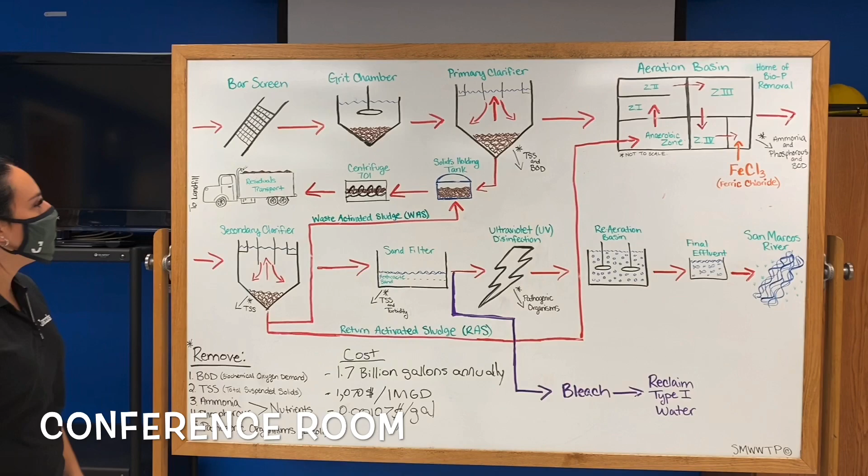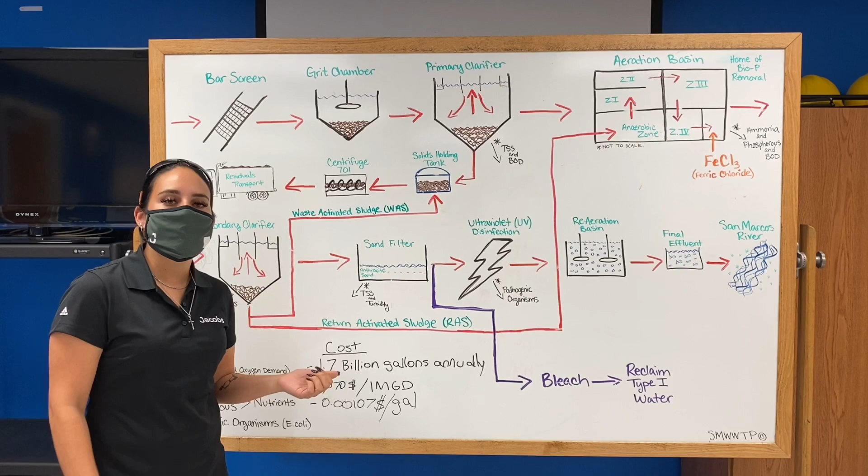Conference room. I'm going to give y'all a quick overview of our treatment process via this drawn out diagram. So basically our influent water comes in first through the headworks and then we'll run through the bar screen and the grit chamber. The purpose of this physical process is to take out all the rags and toilet paper and grit and sand that may come through the water, and then that will be dumped in a dumpster and hauled away to the landfill, and the rest of the water will continue on to the system to continue the treatment process.

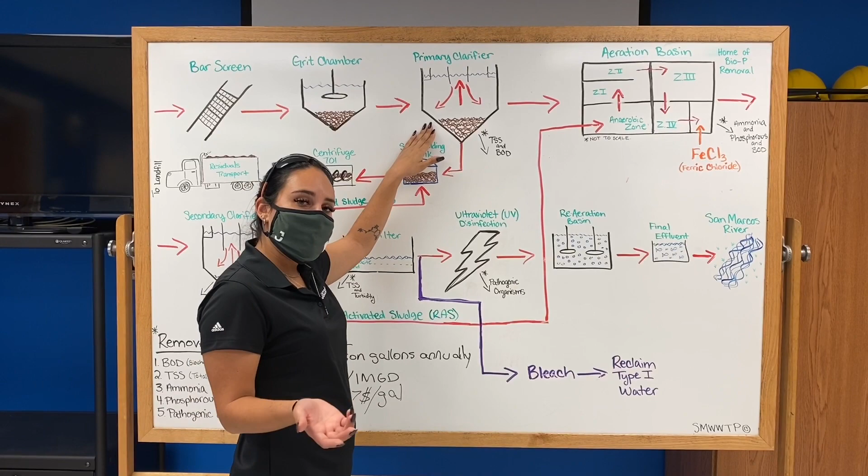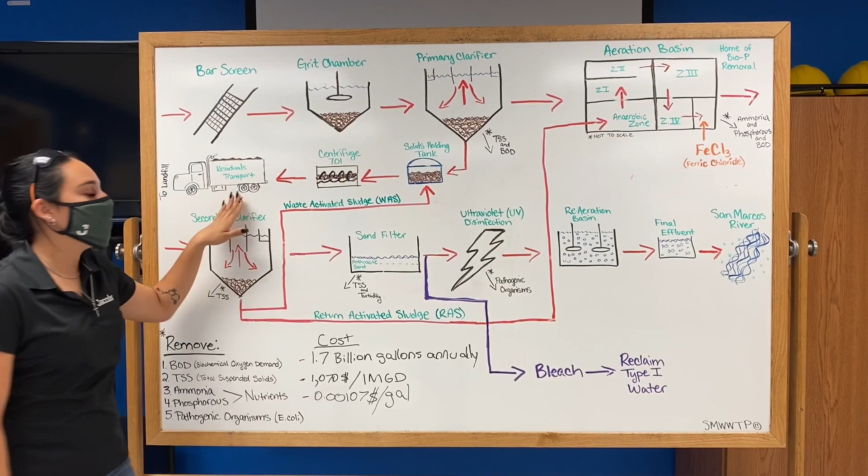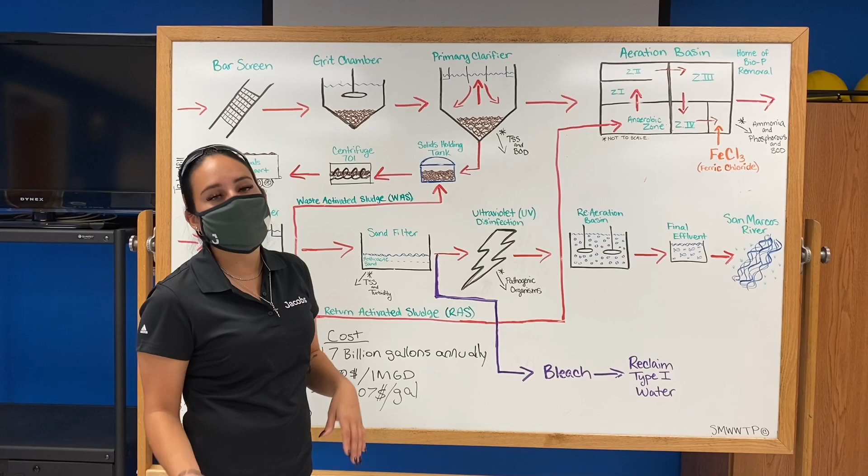After it goes to the bar screen and grit chamber, the water will continue to the primary clarifier, which is another very physical process. The solids will drain to the bottom and get pumped out to the solids holding tank and will get processed in the centrifuge and get hauled away to the landfill. And we'll go into biosolids management in a different episode because some facilities will use their biosolids and convert it to fertilizer. Unfortunately, at this facility, right now we just haul it to a landfill.

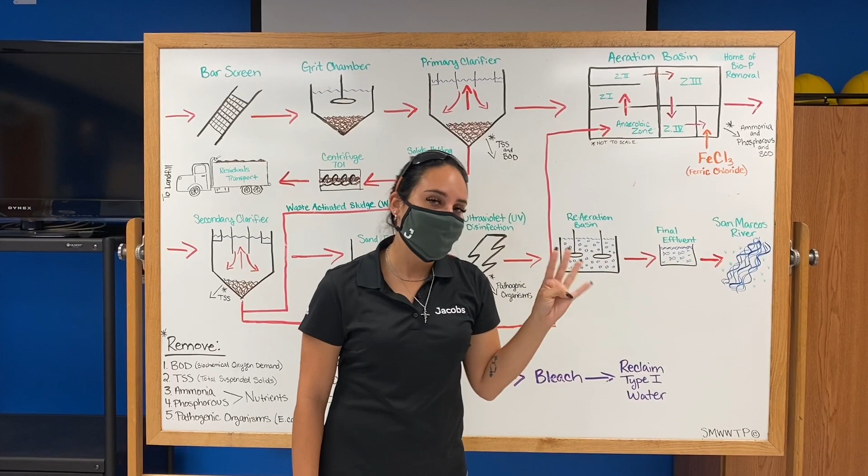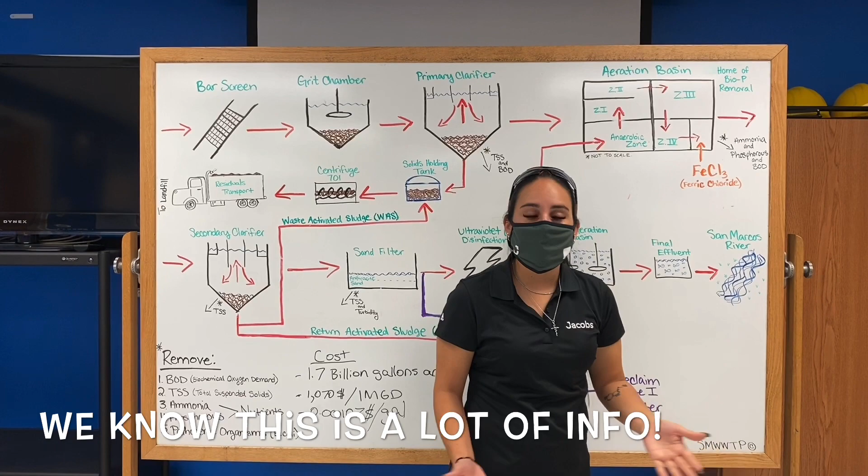So from the primary clarifier, water will go into the aeration basin. We have an anaerobic zone and then 4 zones, and we have an identical side with another anaerobic zone and 4 zones. So the purpose of the aeration basin is our little microbiology environment that we build and maintain to treat the water biologically and to meet our permit requirements.

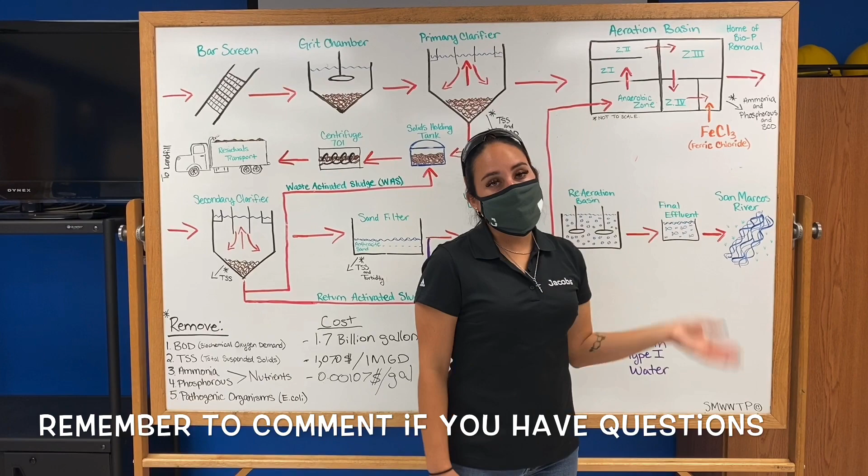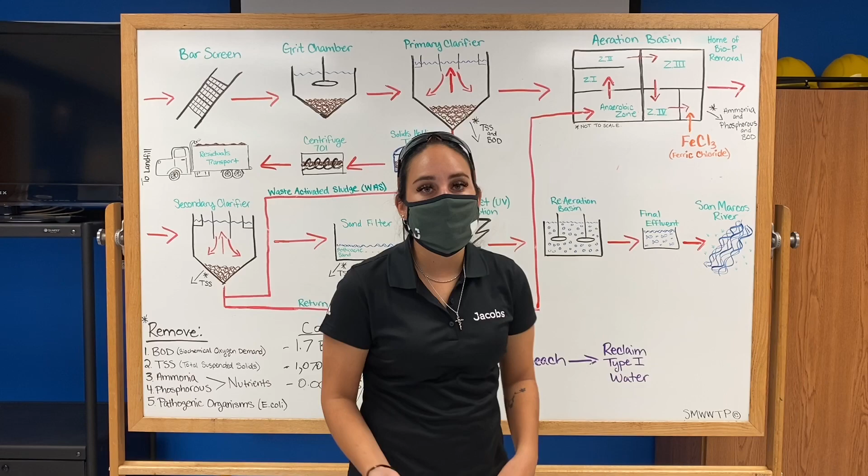So for example, our phosphorus limit is 1 milligram per liter. And if we get close to that limit, then we add ferric chloride, our chemical, but we try not to add the chemical unless absolutely necessary. What we try to achieve is biological nutrient removal or biological phosphorus removal via the organisms that are already present in the wastewater. And this is the area in which we try to do that.

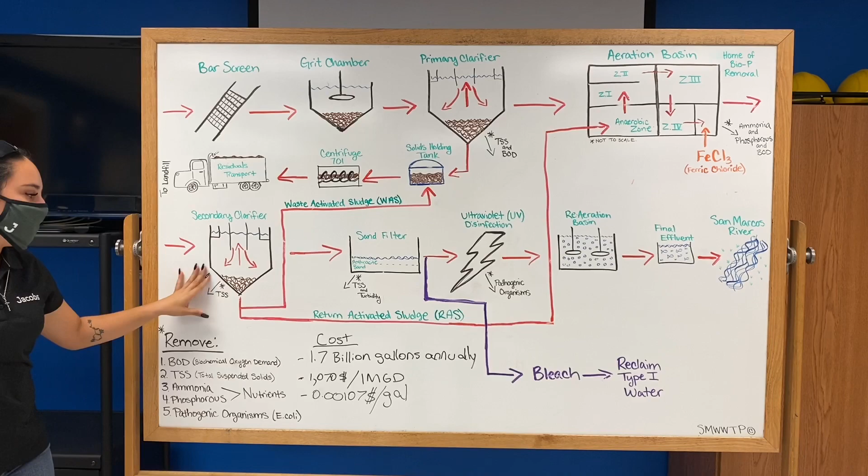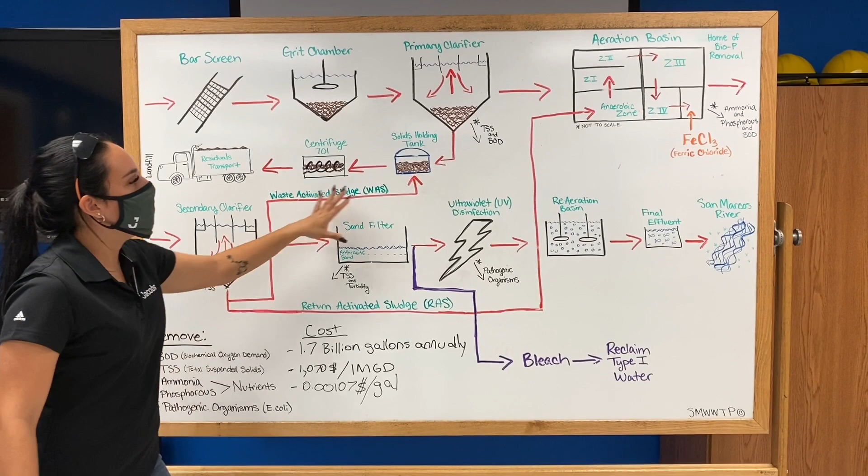So after the water gets treated and the phosphorus and other nutrients are removed in the aeration basin, the microorganisms will move on to the secondary clarifier, and those microorganisms and leftover solids will get wasted out in this area here, very similar to the primary clarifier, and it will get pumped back to the solids holding tank. But the only difference in the secondary clarifier, the other half of the solids will actually get returned back to the aeration basin to keep our bug or microorganism population alive, so we can continue doing our biological nutrient removal or biological phosphorus removal process.

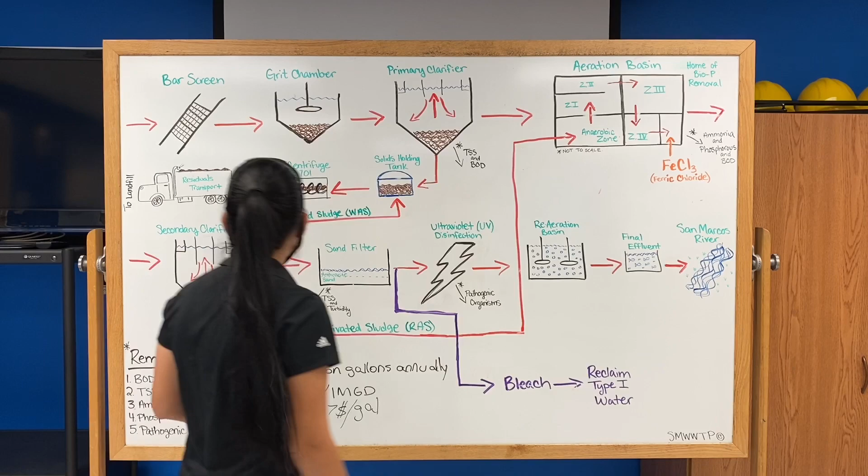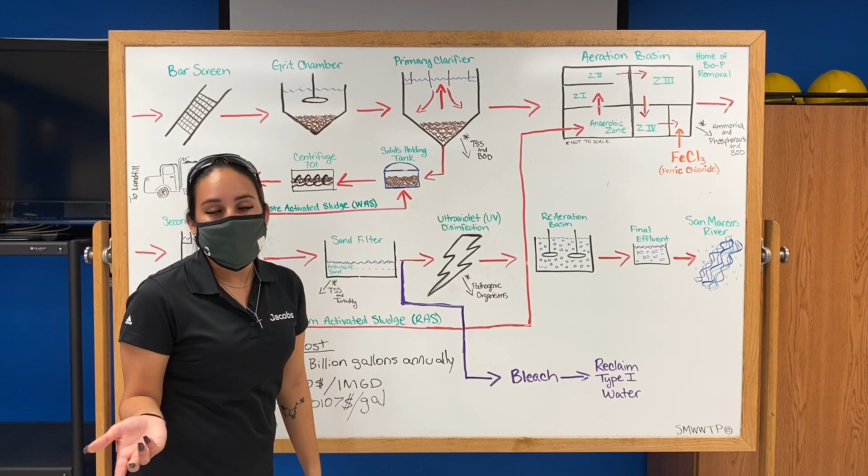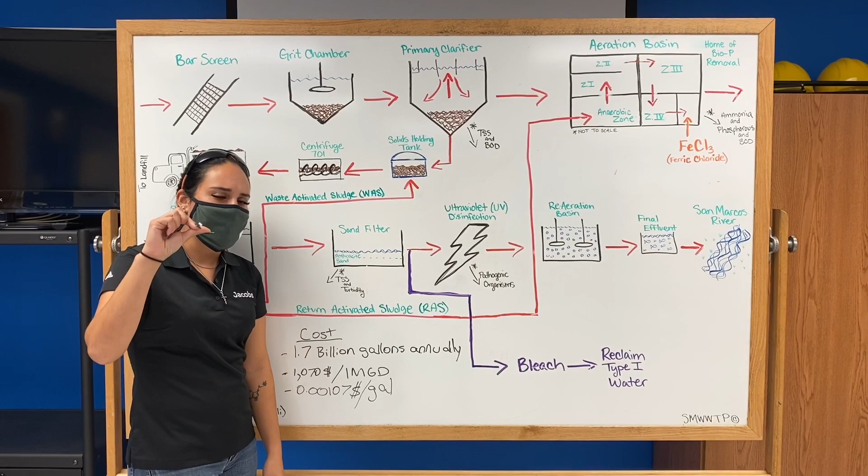So from the secondary clarifier, after the solids have been removed, the water will continue to our sand filters or tertiary filters. So if any of you have any fish at home in a fish tank, you probably use carbon filters. It's a very similar process. We use anthracite and sand to filter the water to get those fine microscopic particles out, so then we can disinfect it via UV light.

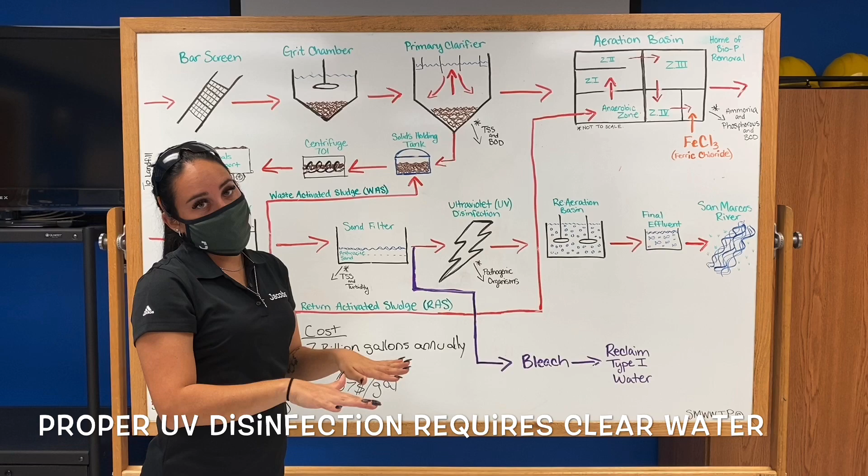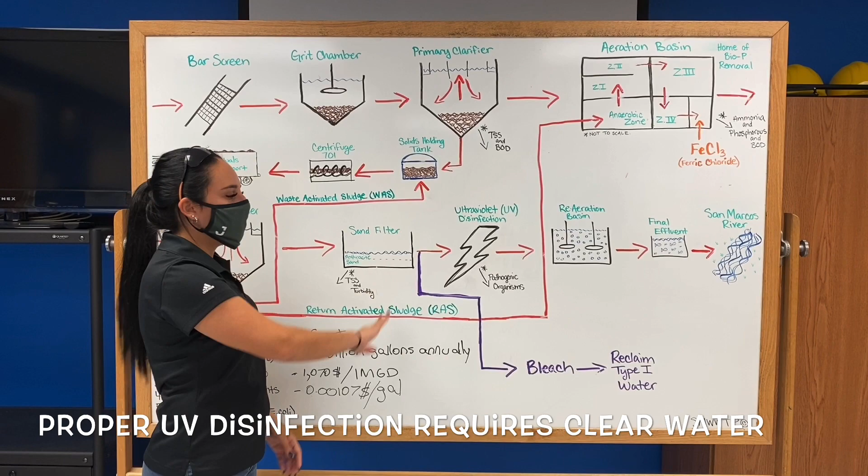So the sand filter is a gravity system. The water will drain through the anthracite and sand downward, get backwashed, the dirty water out, and the backwashed water will return to the front of the plant and the treatment process will start again. The rest of the filtered water will continue on to the UV disinfection system. It will get blasted with UV light, just like a tanning bed.

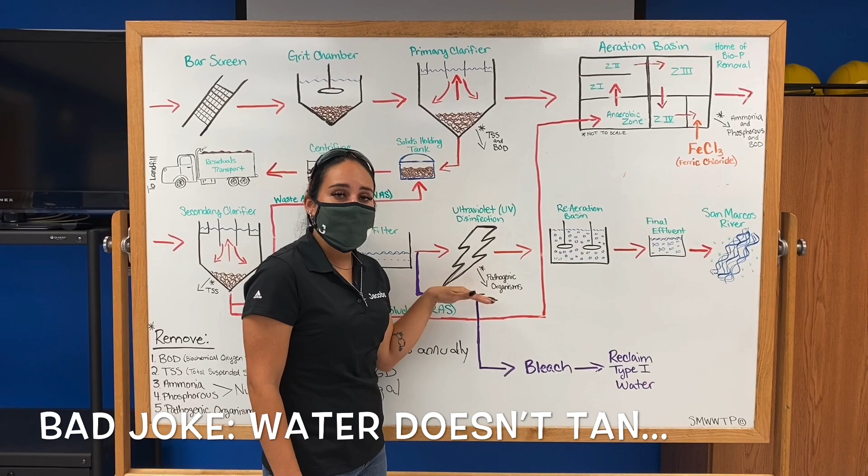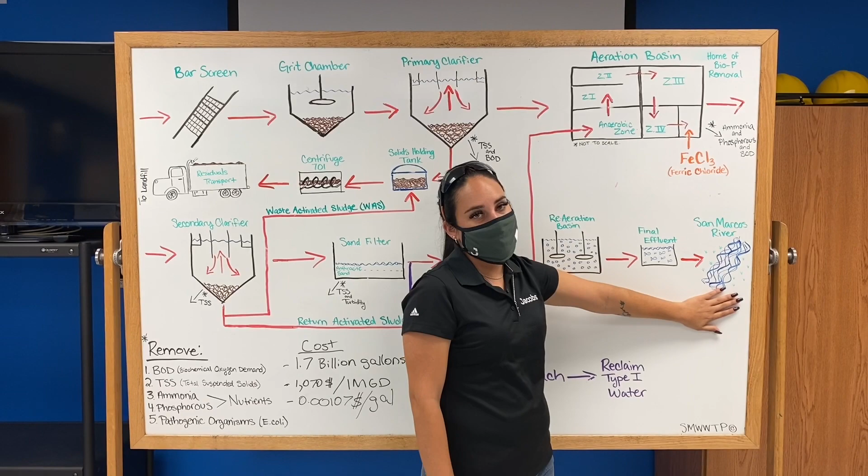So the water is getting a tan, and the pathogenic organisms and their ability to reproduce will be cut. And then it will continue on to the re-aeration basin, where we add dissolved oxygen via diffusers. And then we hit our final effluent and then discharge into the San Marcos River. As you'll see later in the video, when we go outside, you'll see the San Marcos River and all the fish and wildlife that are present around the facility and in San Marcos.

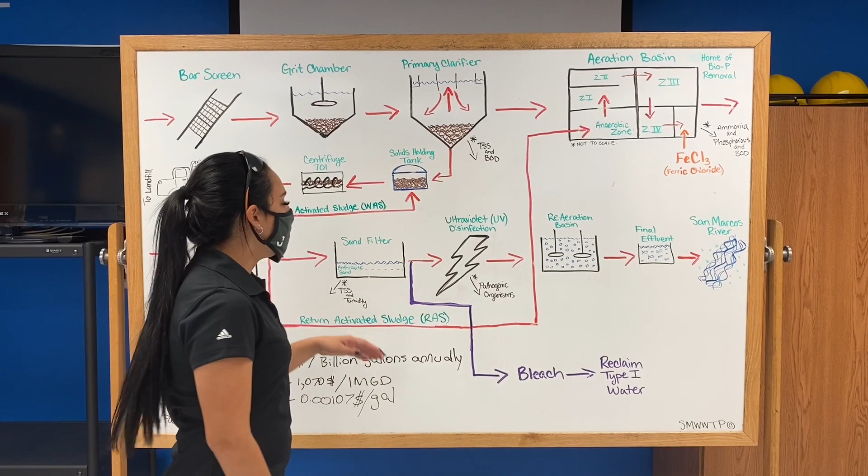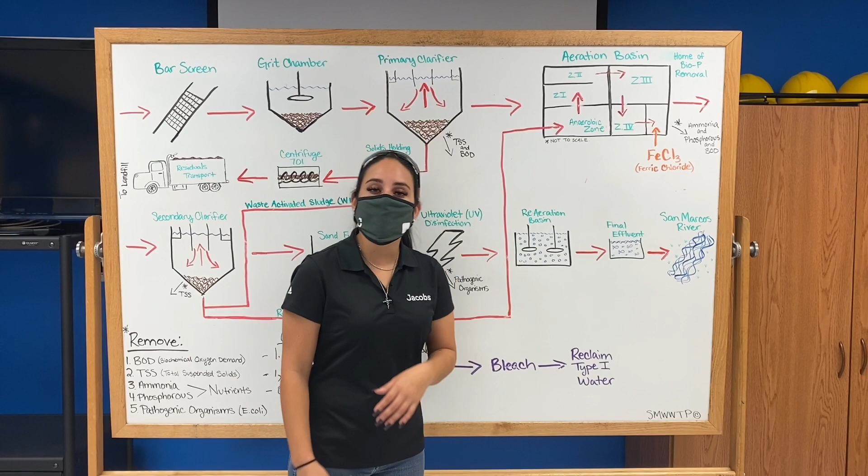So we also produce what's called reclaimed water or reuse water. So before the water goes to be UV disinfected after the sand filter, some will be pumped out separately to be disinfected via sodium hypochlorite, or really strong bleach. After the reclaimed water is disinfected with sodium hypochlorite, then it's ready for distribution around the city. We also use the reclaimed water here at the plant. So now, after I give you this overview of our treatment process, let's go ahead and head outside and show you the actual facility.

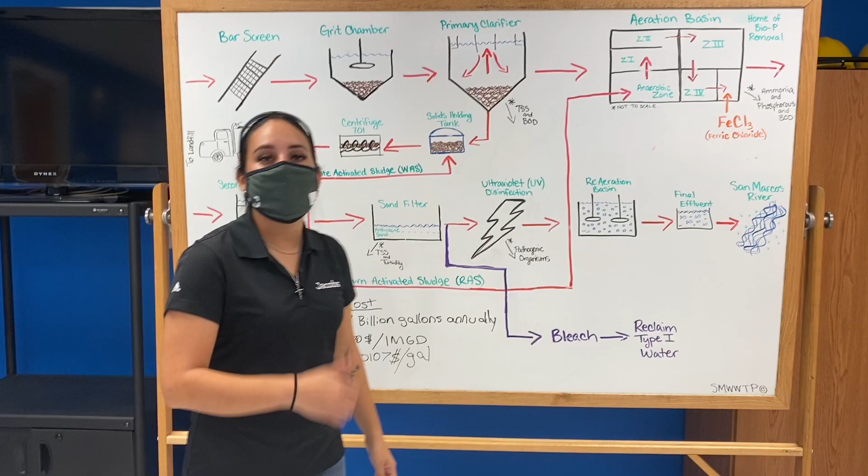Welcome to the headworks, and forgive me, I'm a little out of breath and out of shape. We have to come up two flights of stairs to come up to the headworks, which is where all the influent water comes in. So our treatment process basically is gravity fed, which is why we're at the highest point of the treatment process, and the water flows downhill gradually until the final treatment process. So basically the purpose of the headworks, if you want to follow me, my camera lady, Elizabeth, of course, are screens, grit chambers. Again, we'll go into further detail in later episodes.

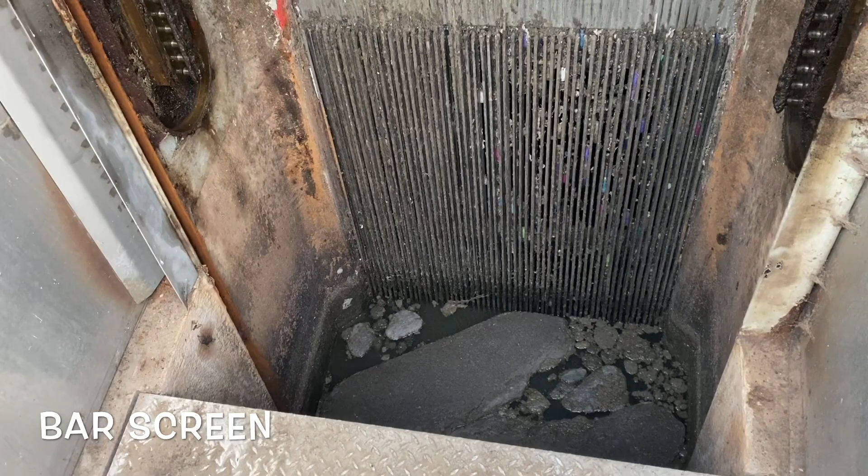So basically just think of a giant mechanical rake removing rags and grit. So this is the bar screen. So it's not running right now, but basically it's a really fine rake, and this will go down, pull up all the rags and dump it over the edge and down into the dumpster. Again, it's like a giant mechanical rake. We have our grit chambers, which remove all that fine grit or sand that comes in, whatever you may flush down the drain. And I would also like to note a few things.

You should not flush anything down the drain except toilet paper. Literally. Please do not flush flushable wipes. They are not flushable. They do not break apart. And you'll see why. On our next episode, we'll go into further detail about how the headworks really work. But just to give y'all an idea, after the rags and the grit are removed from the water, they come and dump in this giant dumpster.

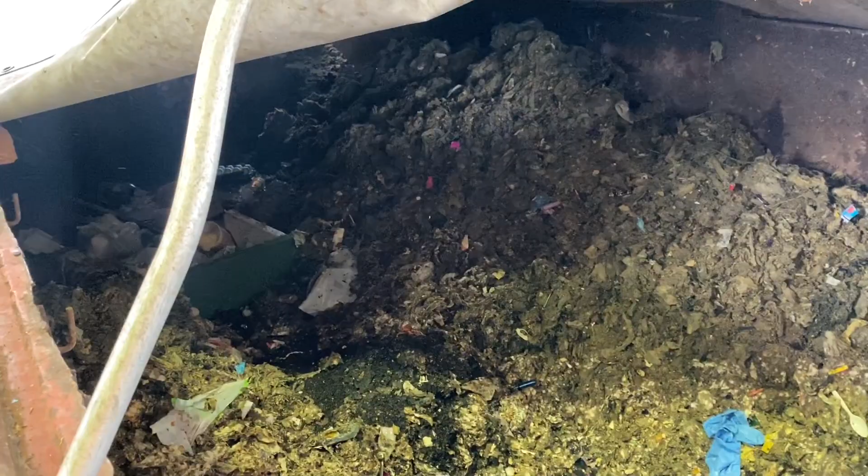So just to give y'all a quick view of what goes down the drain, people will flush spoons, condoms, tampon applicators, Pop-Tart wrappers, you name it. It's ridiculous. That should not go down the drain. That should go in the trash can, people. This is another reason why we're trying to do this vlog. Educate the world. Please don't flush anything except toilet paper.

Where we start our first part of the physical treatment here. Now, once the water passes through the bar screen and the grit chamber, the water is sent towards the middle of the basin, where it will pass through the feed well, and then it will be dispersed throughout the entire tank. We try to do this to slow down the velocity of the water to allow that material to settle at the bottom of the basin or to float.

Now we have mechanical equipment that will scrape the surface of the water to take all that floatable material and drop it into that skim box. And parallel to that, we have another rake arm that will gather all of the solids from the bottom of the tank, and then it will be all wasted out and sent towards the solids holding tank.

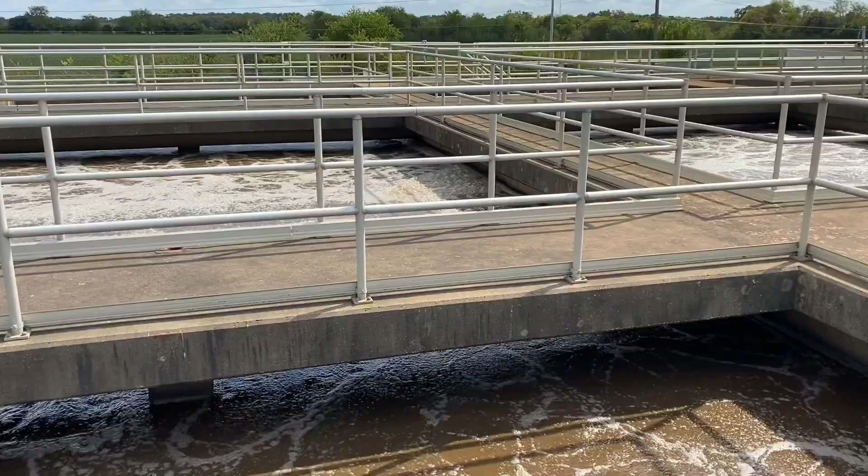Or in this case, the other half is either being wasted, like I said, or returned, known as return activated sludge, back to the aeration basin to keep our microorganism and food and bug population healthy and alive, so we can continue that biological process I was telling you about, which we'll go into detail in later episodes.

But as you can see here, very similar process. The water comes in through the middle, the velocity slows down, as Arisbeth was saying, and all the solids settle. There's a scum arm that rakes the very top of the water and dumps into a scum box, and then gets returned to the beginning of the plant to continue the treatment process.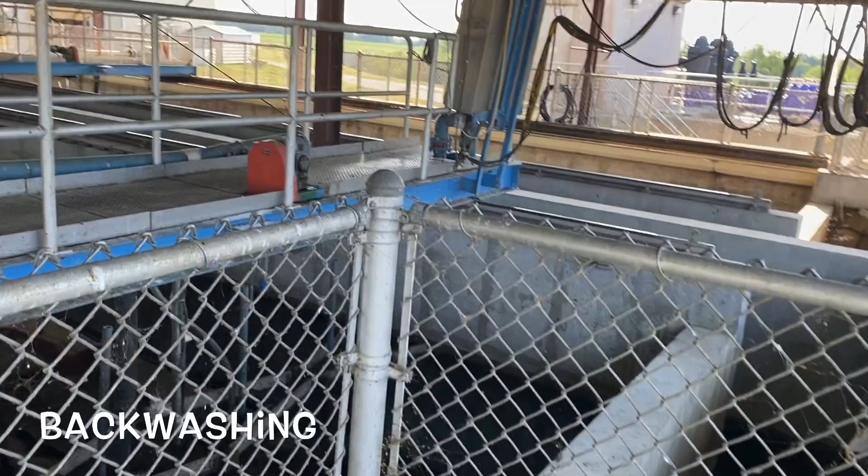After it passes through the sand filter, it will go towards our UV light disinfection. This will kill the pathogenic organisms, preventing them from mutating or reproducing later on after this treatment. The light bulbs are submerged into the water to make sure that it's killing anything that's passing through.